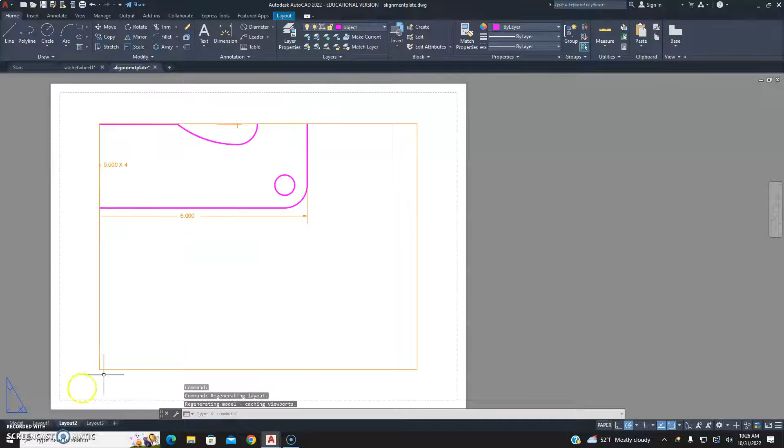Okay, so today we're actually going to work on the alignment plates. So I switch over to the model tab. Here we go, our alignment plate drawing, which we have done before by hand.

I'm actually just going to break this dimension off here real quick. Our alignment plate drawing is relatively simple, particularly easy in AutoCAD once we take advantage of a couple new tools.

So the first thing we're going to do is open up either our template file or our ratchet wheel drawing, either one doesn't really matter. What we want to do is make sure we do a save as first. So assuming you've saved your ratchet wheel, just for safety's sake, let's click Quick Save and make sure it says ratchet wheel under the file name here.

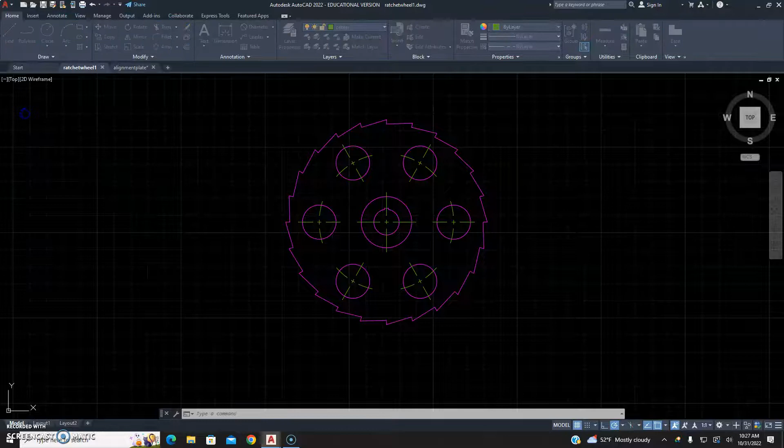Now we can do Save As, and we're going to change the name of the file to alignment plate. So we're just going to do big A, save as. I'm going to call this alignment plate, save. Okay, so again we can verify under our tab here that says alignment plate. We can also check up top here with the location of the file.

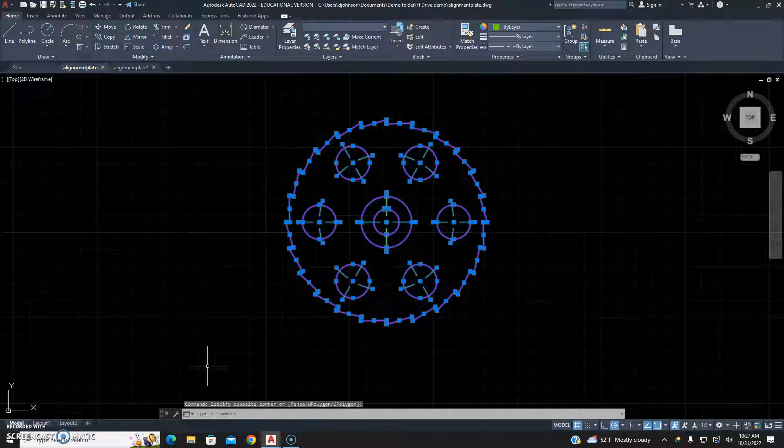And now we can just delete our lines that make up our ratchet wheel. We're going to switch our layer type over to Object to start.

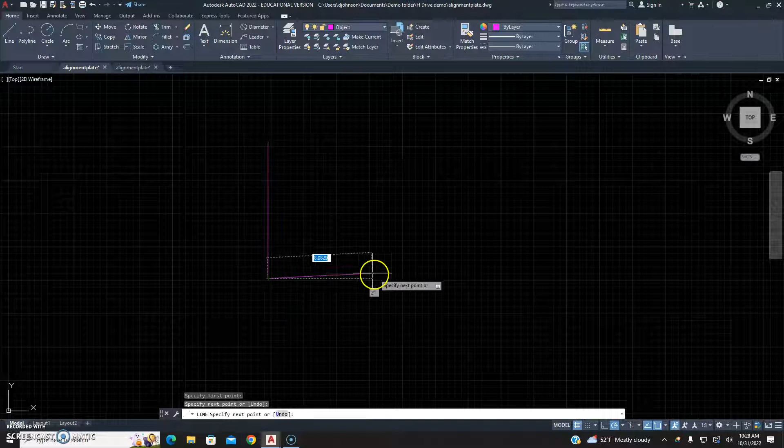So I often mention when we're drafting that one of the best ways to get started drawing by hand or even on screen is to start off with a vertical line and a horizontal line. I often like to work in the lower left-hand corner, but that doesn't really matter in this case. So we're just drawing a line. Again, I made them approximately 8-9 inches long. Doesn't really matter.

That's how we're going to start this drawing. Now what we're going to do is recall what the total width and total height of this alignment plate is. So our total width was 6 inches plus the radius here, so 6 9/16 of an inch. And our total height was going to be 2.5 times 2 is 5, plus 9/16 times 2, so 6 1/8. So 6 9/16 wide by 6 1/8 tall.

So to represent that here, we're going to take these lines and make them at those dimensions. There's a ton of different ways we can do it. We're going to use our offset command. So we're going to click on offset, and we're going to start typing out our width. So let's go 6 dash, and the dash is important.

If you hit space, it's just going to select 6 instead. Space is the equivalent to enter. And then we're going to type 9/16. So 6 dash 9/16, no spaces, we're going to hit enter. Okay, and we can verify what it was switched to down here in the command line. 6 dash, I know it looks like minus 9/16, but it's actually going to be 6 9/16.

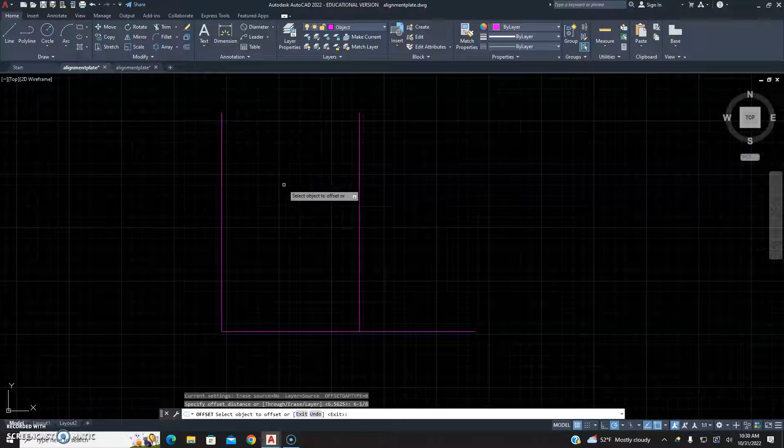So we're just going to repeat that process. Hit escape, we'll go to offset again, and we'll type 6 dash 1/8 and hit enter. We're going to click our bottom line, and we're going to go up. And then we'll hit escape again.

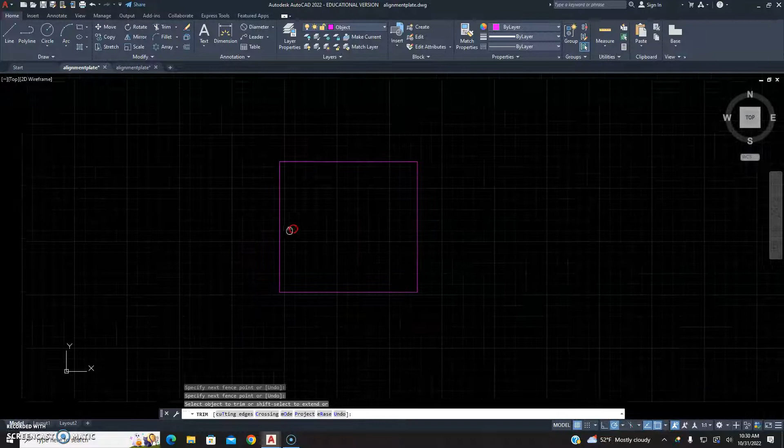And we want to trim away all our excess lines. We're going to click on trim. We're going to hit enter once. This is very important. Then we can just click or draw a line to all of our little tails of our lines. So now we're left with our base rectangle.

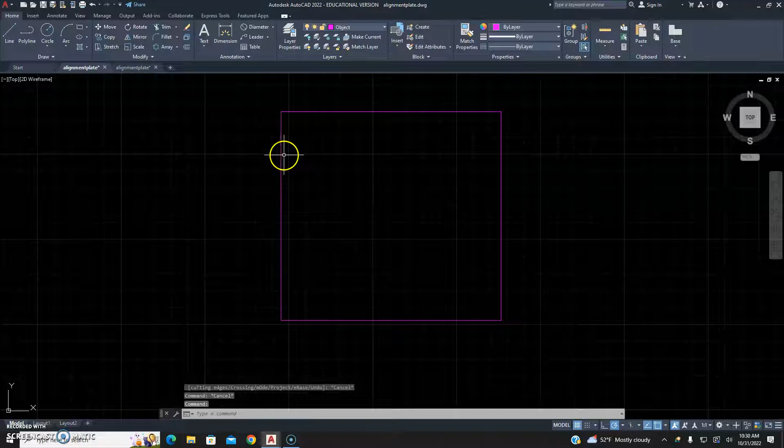So next we want to round off all of our corners so that we can find our circle centers. So to do that, there's again a few different ways. You could use a circle, you could offset your lines and use a circle to find the center point. There's actually a tool that will round off the corners for us. Okay, so this is a new tool. We're going to click on fillet. It's fillet, not fillet.

Pronunciation matters. Engineers and architects and anyone who uses CAD will laugh at you if you pronounce it fillet. It's fillet. Okay, so we're going to click fillet.

And by default, fillet is set to a radius of 0.00. What that means is it's a sharp corner. So if I were to just straight up use the fillet command right now, assuming I don't have anything set, click and click, you see it does nothing to the corner of our object here.

So I want to fix that. So what we do is we go to fillet again, and we see down here it gives us a lot of options in our command line: undo, polyline, radius, trim, multiple. And some of the letters are in blue.

So for radius, I want to type R and hit enter. And now it says specify fillet radius, and it shows that we're currently set to 0.000. We want to set our radius to 9/16. Enter.

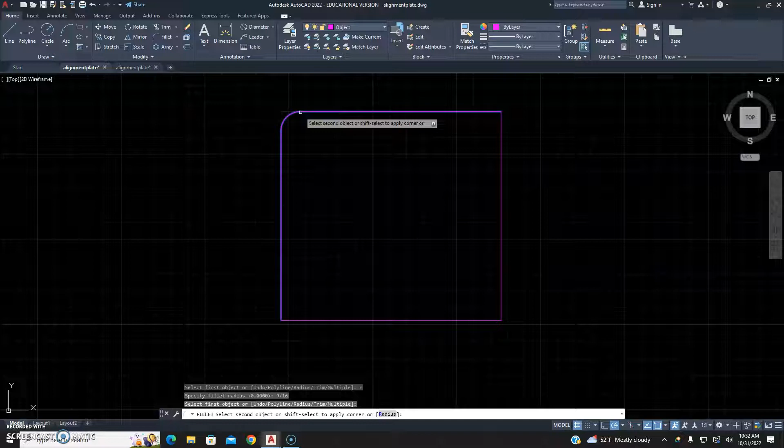I'm sorry, fillet is not modal by default, but it can be. I actually prefer to have it set that way, but it's not. Once we click our two lines, we see it rounds off our corner. We can right click and hit repeat fillet. I actually don't need to fillet the top lines, I'm just doing that so everything looks good, and you'll see why later on.

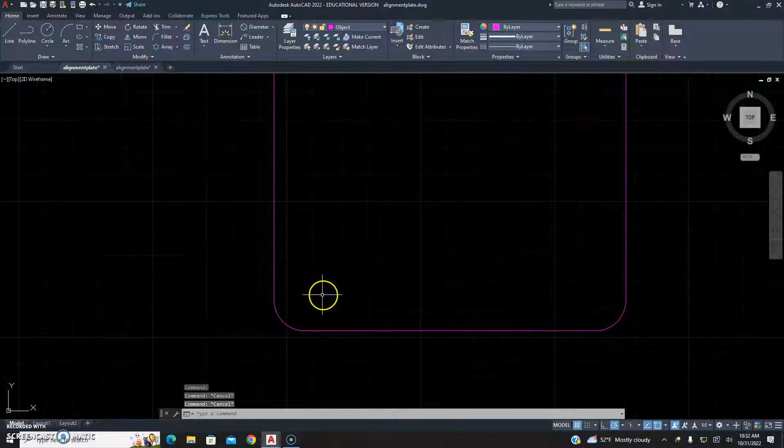All right, so we have all of our corners filleted, and that will automatically find our center points for our circles for us. So let's go in and get one of our circles prepared.

So our holes are 1/2 inch in diameter, meaning 1/4 inch in radius. So we're going to go to circle, C, enter, hover over our fillet, and you'll see this little white plus pop up. We'll go there, and type 0.25 and hit enter. We have our circle.

Now we're going to offset that circle. Offset, let's try 0.1, I think that would be good. We don't necessarily need to go 1/8 of an inch, that might be a little too big. And we're going to put in our center lines here to start.

So we're going to switch over to center. We'll draw a line across that circle that we just offset, and then down as well. We're going to delete our outside circle.

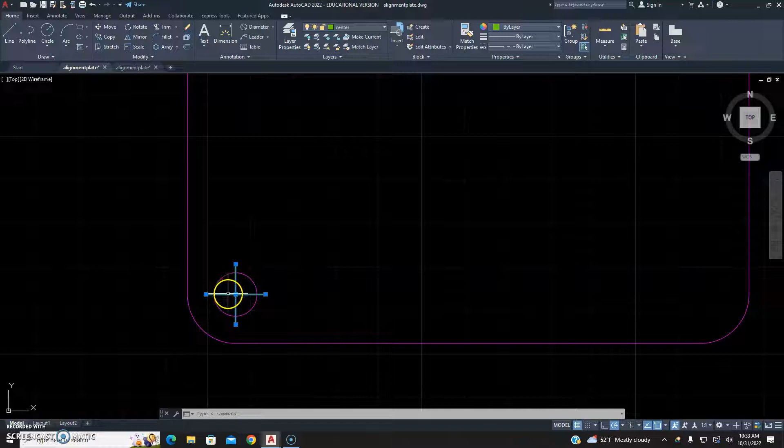And then we want to adjust the line type scale of these center lines, just like we did back in our ratchet wheel. So we'll click each of them individually, left click, and then right click on one of them—again, not at one of these nodes, but somewhere on the line. All I have selected are my two center lines, not the circle. Right click on it, and we're going to hit Properties.

Brings up our Properties toolbar, and we go down and see line type scale. So I'm going to reduce that number. Anything less than 1 will start to bring up those dashes. Let's try 0.5. We notice there's no dashes here, so let's try 0.25. All right, 0.25 works, so we're going to leave that.

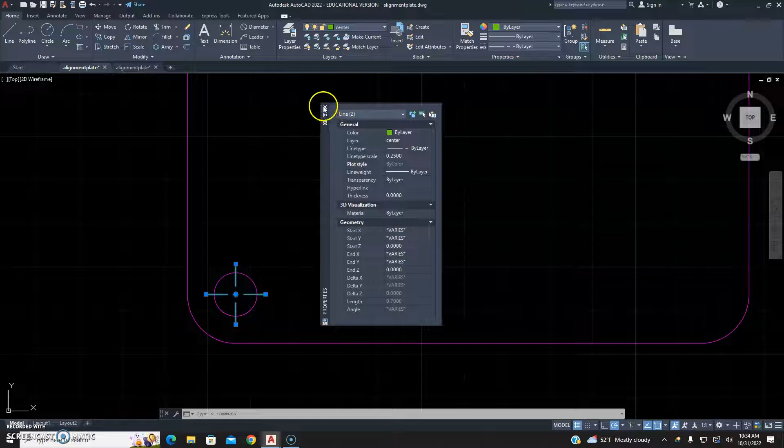So we'll hit escape. Now what we can do is repeat the whole process over again for each corner. What we're going to do, though, to make life easy, is use the copy tool.

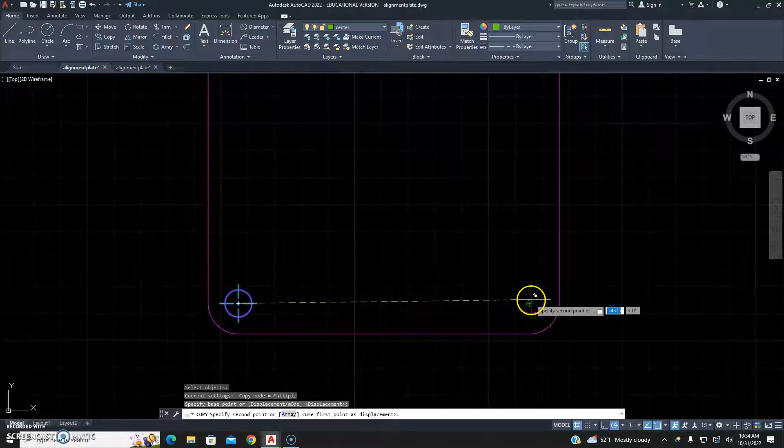So we're going to click copy. It says select objects, so we'll draw a box around our circle and our center line. We'll hit enter. Our base point is just going to be the center of our circle. Then we'll hover over each corner till we get our little plus there, and then we can just paste that all over the place.

Easy peasy so far. So now we want to start working on our middle. What I like to do for this sort of thing is just throw a construction line down the middle for now, and that midpoint marker is really handy. We'll come back to that later on.

And use the center line to sort of build out all of our structure here. So if we go over to our dimensions, okay, we've got 1 inch from our center line here, so it looks like we're going to offset our center line up 1 inch. Then we want to find our two center points for our curves here as well, and those are going to be 1.75 from the right, offset in.

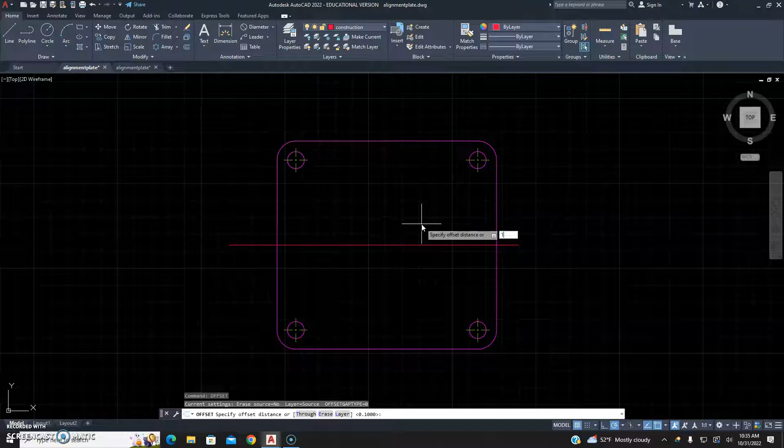So we've got to do 2 offsets now. So offset 1 inch, enter. We'll go 1 up and 1 down. Don't worry about the fact that that's a construction line for now, we'll fix all of that at the end. And then we're going to do offset again, 1.75, enter, and we'll bring our right side into the left.

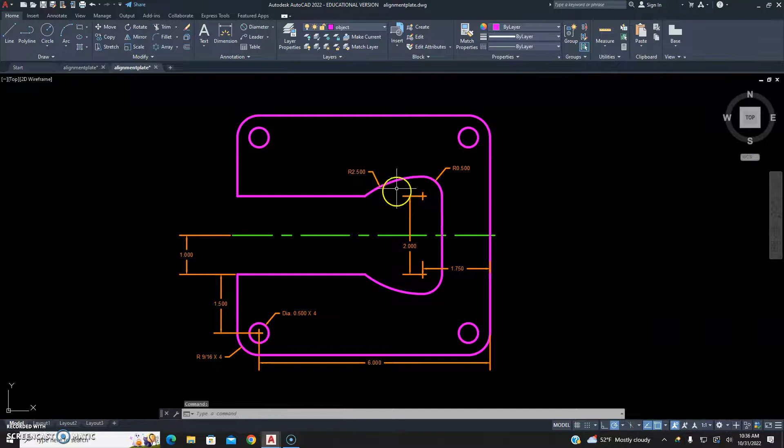And now we have our 2 circle centers for our weird little transitions here. So it looks like we're going to draw a 1/2 inch radius and a 2.5 inch radius. Go back over here, make sure we switch over to object for this, and we'll hit C for circle, and we'll do our 1/2 inch radius right here, 0.5, and then again 2.5.

And we're going to do that same thing for each one. So 0.5, and then 2.5. Now, why have I done this way?

There's a lot of cleaning up to do. I'm actually going to delete the 2 circles from the top, and you'll see why. I'm trying to just get the bottom completed. Yeah, that's really our goal here. So we'll delete that. We'll delete, that's going to go away. All right, so now we'll come in with trim.

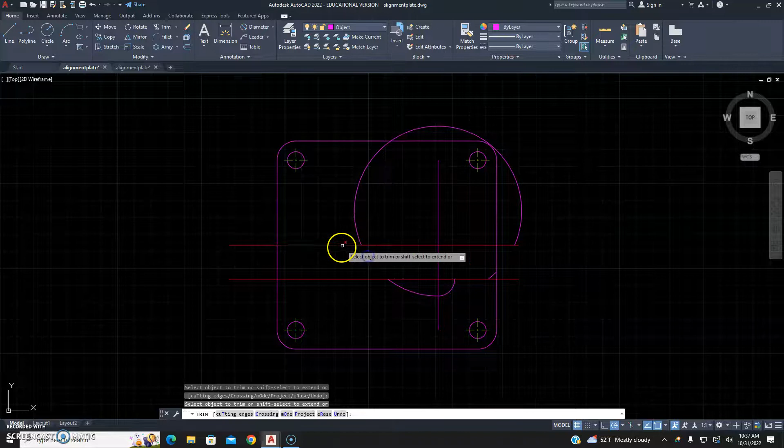Type in the word trim, hit enter twice. We'll just clean all this up. We want to leave that and that, and there. We'll just delete what remains of our circle here.

And then last but not least, we're going to draw that line straight up there to our center line, what will be our center line, I should say. And we're just going to draw this straight across. And we can delete our red line now, and we can delete our vertical guideline that we offset. And then we're going to turn this into a center line.

The first thing I want to do, though, is hover over our midpoint and just adjust it down a little bit. And we'll turn that into a center line for ourselves. And now we'll come in with trim, and we got to trim this out.

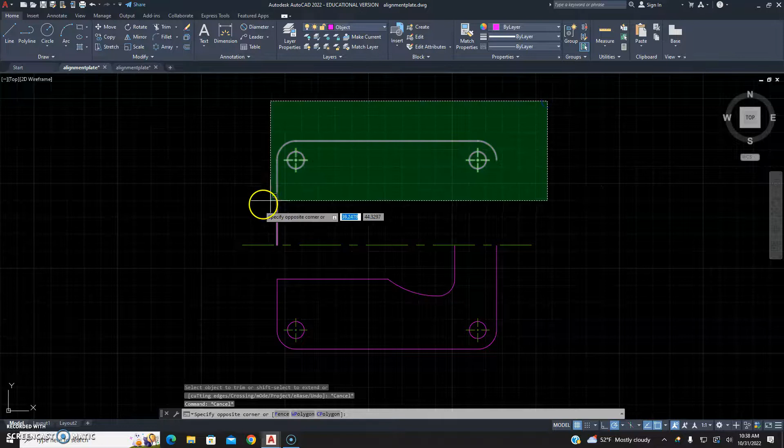So now we've got half of our project done here. I'm actually going to trim away the other half here, and we're going to delete the entire top half. So we have half of our alignment plate done.

And now what we'll do is we're going to use the mirror tool. So this is also a new tool in addition to fillet, and then we also reinforced offset and trim a bunch. So we'll click on mirror, and then it says select objects. So we're going to select the entire bottom minus our center line, and we'll hit enter.

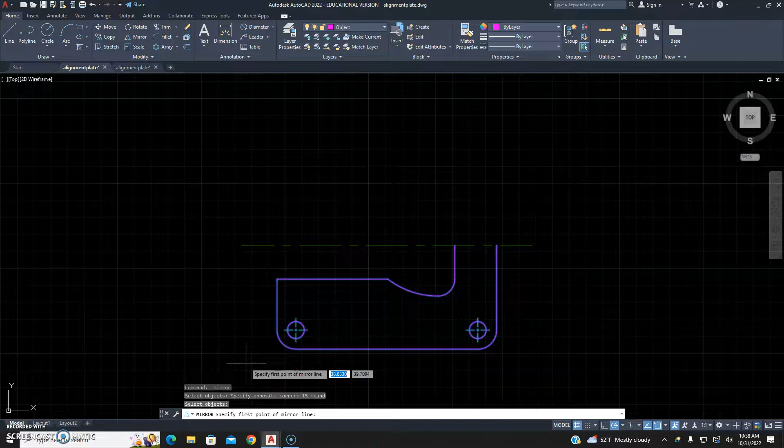Now it says specify first point on mirror line, so that's just going to be our center line. So we click once, and we go along the line, and we click a second time, and then it says erase source objects, now that we've clicked our second time. We definitely don't want to do that, so we're going to type N for no and hit enter.

And now our alignment plate is done. Okay, that's all it takes. That mirror really saves us a lot of time. Obviously, not as much time as it could have because I did draw a few extra things up top. But you're welcome to just draw the bottom half as much as possible, and just mirror that. That's all it really has to do.

So, again, just to review: for mirror, you're selecting your objects, you hit enter, and then you select what line you want to reflect across. And for fillet, make sure that once you activate fillet, you type R and hit enter, and you set your radius to something other than 0, and in this case we're setting it to 9/16. Then it's very easy to, say, round off a corner like this. We can back up, because we don't need to do that.

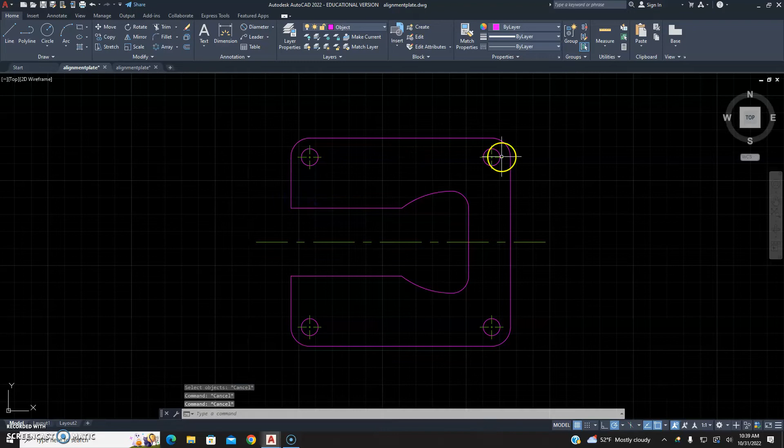And then, last but not least, save. We're going to click quick save, and again, make sure you've already changed the name to alignment plate. If that says ratchet wheel right now, you will lose your ratchet wheel drawing. You don't want to do that. So we're going to click save. And now our work is done.